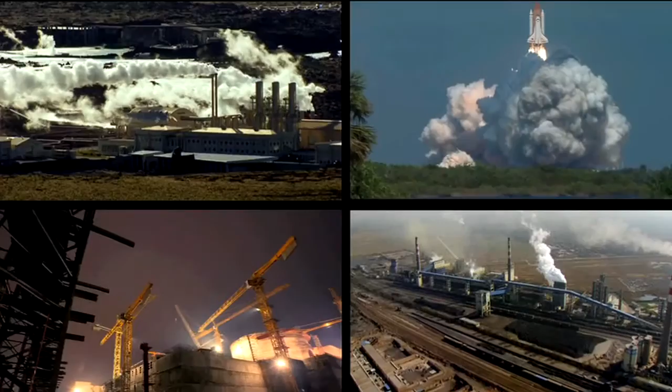We are living in the era of great changes. The power of the human mind has made our life more comfortable, shortened distances, and opened up new horizons. But for the global industry, our era is the time of great challenges.

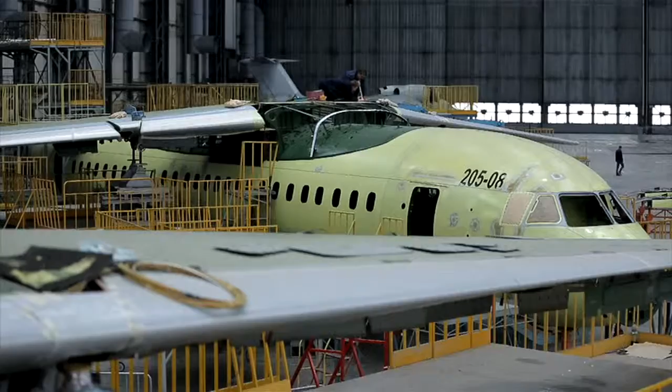The airplane is the fastest and most expensive means of transport. Since the advent of the first aircraft, designers have been working to reduce its weight and make it more reliable, and so reduce the cost of each kilogram carried by air.

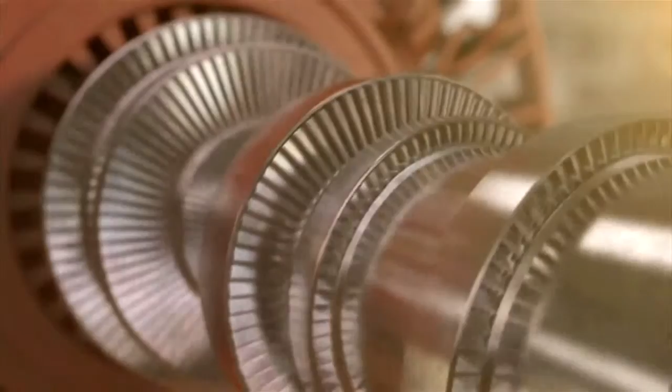Nuclear power is the most promising and cheapest way of generating electric power. However, each structural element of a nuclear reactor operates under conditions of overload and ultra-high temperatures. Extension of their service life and enhancement of their reliability and safety are the main tasks for engineers.

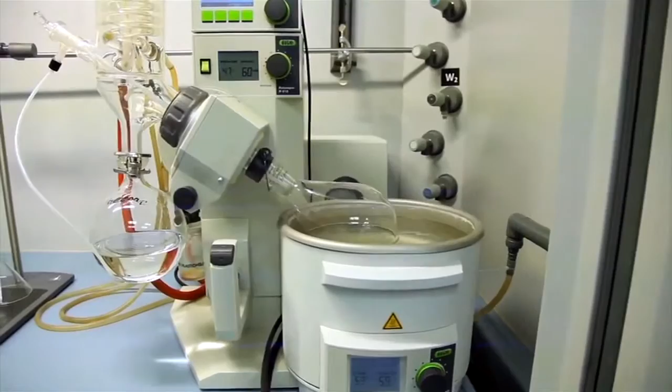Thus, technical progress is impossible without new materials and their new unique properties: ultra-lightness, ultra-strength, and heat resistance. However, the introduction of new materials requires new progressive techniques of their connection.

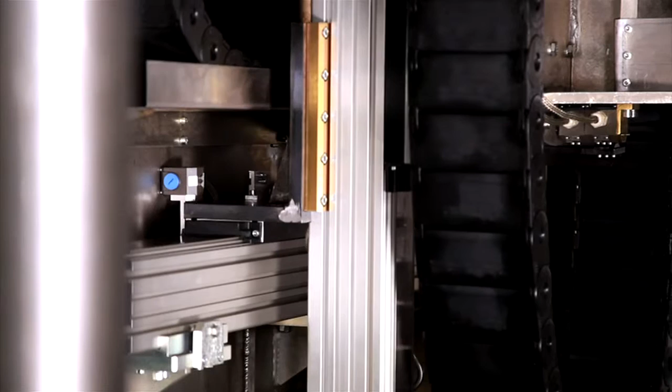For over 70 years, this field of research has been developed here at the Paton Research Institute of Electric Welding. The institute was founded in 1934. It employs 3,500 staff. The Paton Institute has sold more than 150 licenses to the United States, Germany, Japan, Russia,

Sweden, France, China, and other countries worldwide. Structurally, the institute comprises an experimental design and engineering bureau, pilot production facilities, 3 pilot plants, and more than a dozen engineering centers.

The technologies developed by the Paton Institute have served as prerequisites for successful implementation of many audacious global projects, such as forced gasification across the USSR, the world's most powerful weapon, the Satan ballistic missile, continuous welded rail tracks allowing trains to move at 500 km per hour, semi-automatic underwater welding, and welding in outer space.

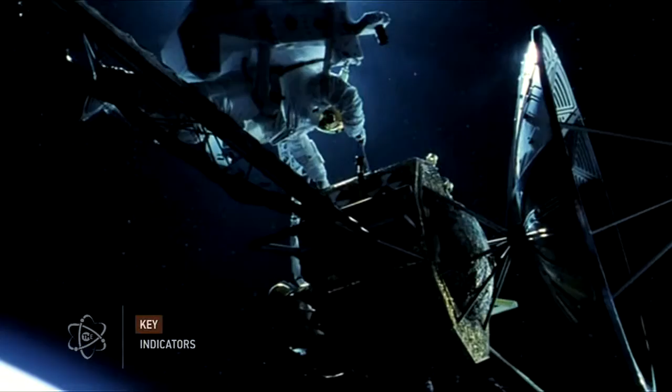Notably, the Paton Institute was one of the originators of electron-beam welding, the technology without which nuclear power engineering and modern aircraft, rocket, and engine building industries would be impossible.

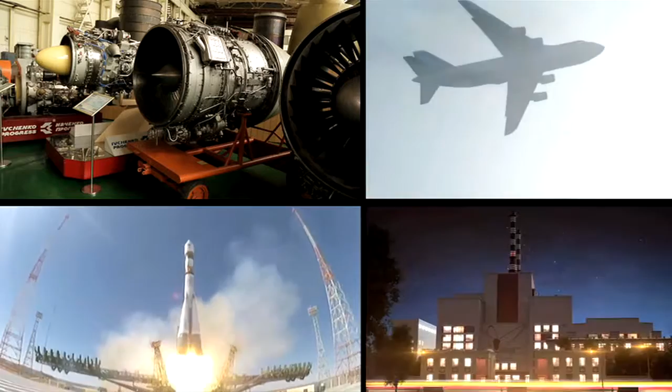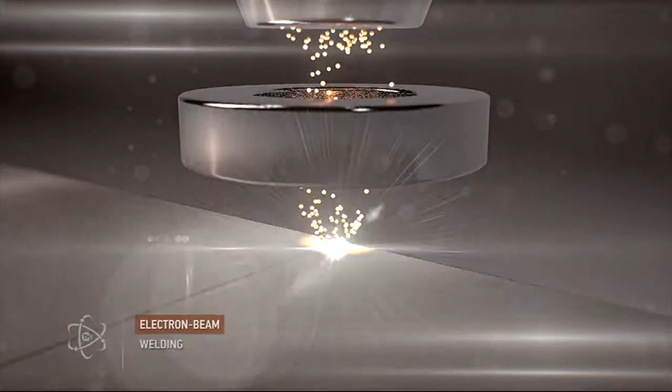How does it work? Electrons are focused into a tight beam and accelerated to ultra-high speeds. When they hit the surface, their kinetic energy is converted into heat, and so metal is heated to high temperatures. As a result, the weld is characterized by large depth and small width.

Electron-beam welding ensures reliable connection of refractory, chemically active, and dissimilar steels, as well as high-strength aluminum and titanium-based alloys. Unlike arc welding, this method reduces energy consumption by 10 to 15 times and the fusion area by 25 times.

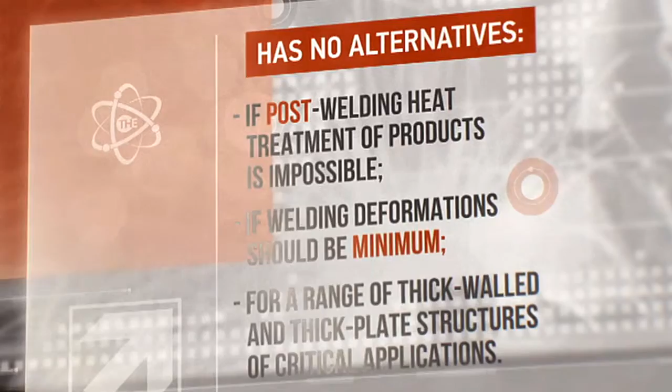Electron-beam welding has no alternative if post-welding heat treatment of products is impossible, if welding deformations should be minimal, and for a range of thick-walled and thick-plate structures of critical applications. Making the most of its powerful scientific potential, the Patton Institute develops unique technologies with due regard for individual customers' requirements. Here are just a few examples.

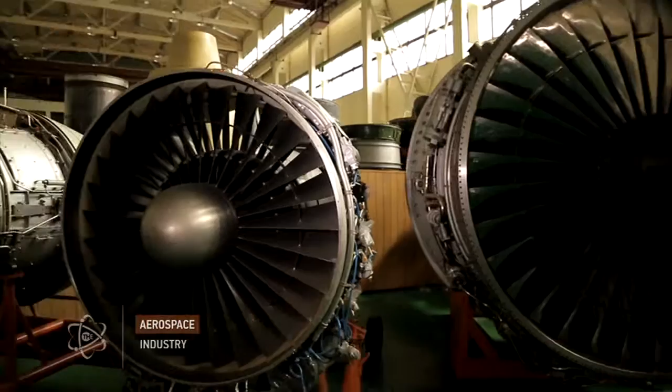The engine is the heart of an aircraft. The manufacturers that offer more economical and more powerful engines win the market. The hotter the gas fed to the turbine, the better these parameters. For this reason, joint connections have to withstand extremely high temperatures.

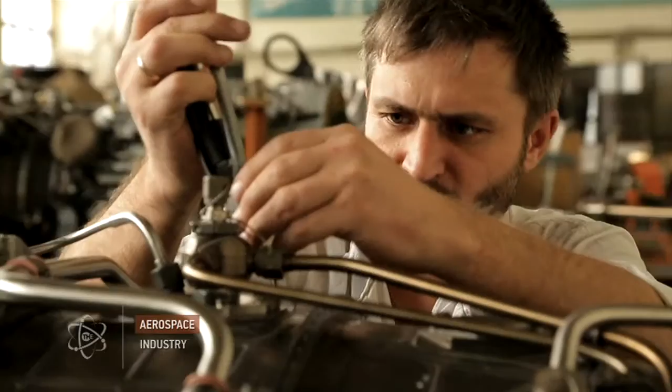In 2014, Patton scientists developed a method to weld the outer part of the casing of the aircraft engine's front intermediate pressure compressor. The customer was Motor Sich, one of the world's leading engine manufacturers. The material was VT5L titanium alloy.

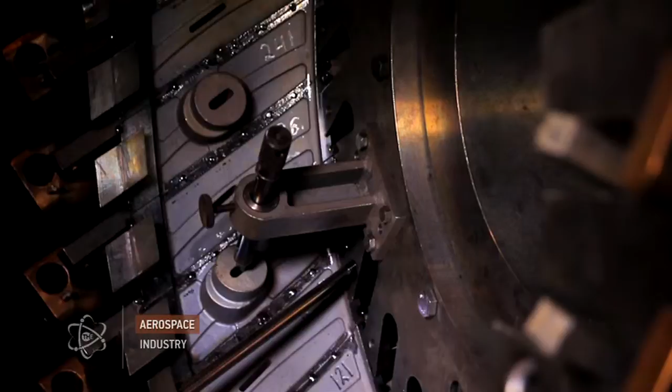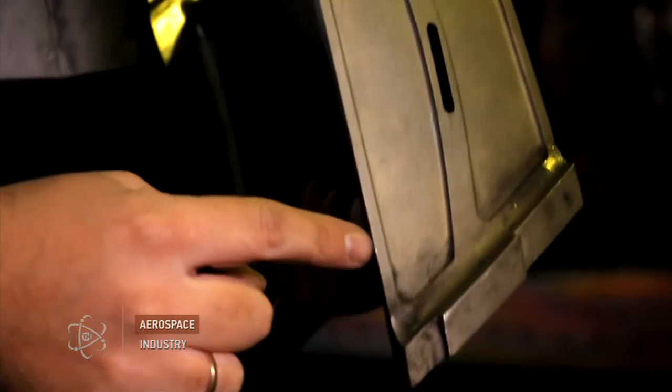Previously, the unit had a cast design, which resulted in high production costs and unstable quality. The developers faced 2 problems while making the welded structure: 1. Geometrically, the joint was a variable cross-section. 2. The through-penetration weld had to be 5 to 25 mm thick and made in one run.

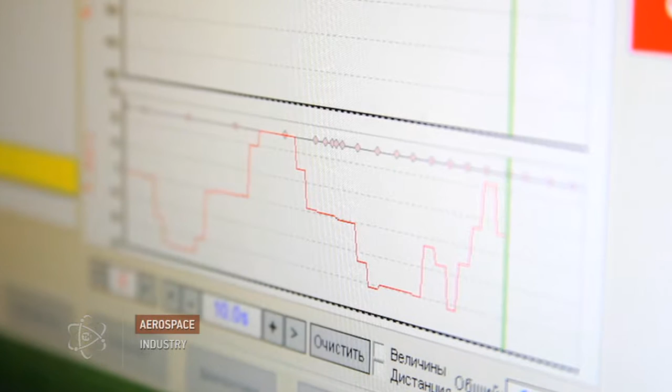Scientists of the Patton Institute found effective solutions to both problems. The process is entirely controlled by special software, and the welding program excludes an operator. The welding factor of joints conforms to the strength factor of the metal body.

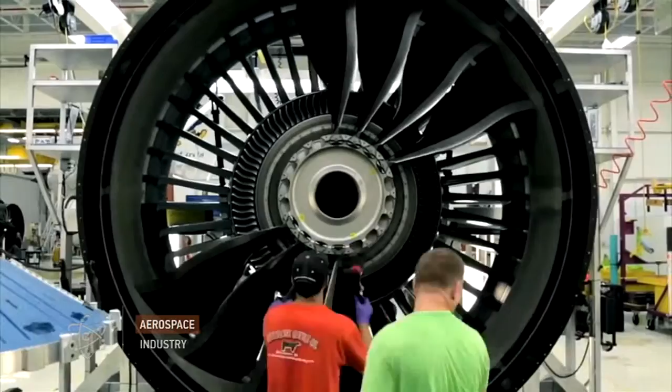The main part of an aircraft engine turbine, the rotating blade, bears the brunt of the heat. The engine's operation fully depends on its strength. And this is about flight safety.

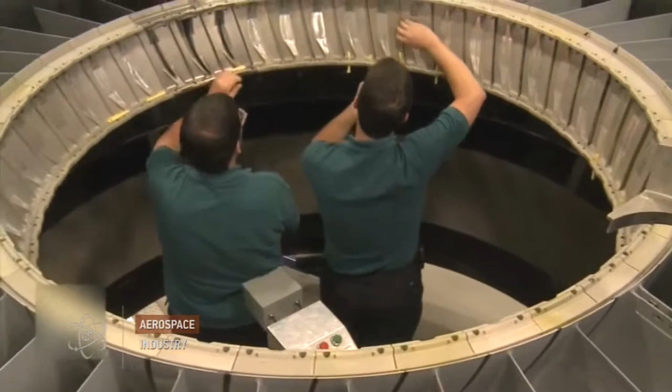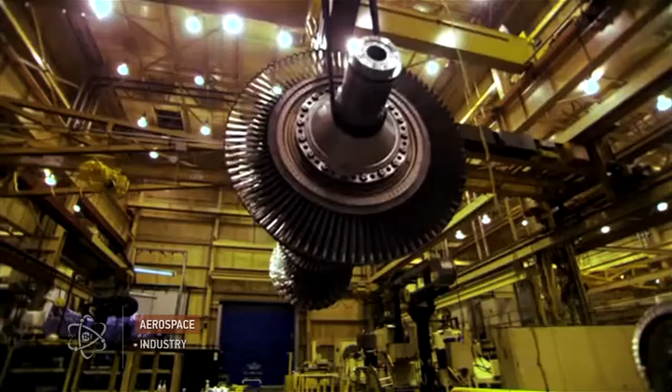Our technology provides for the service life extension of this part by several times. The economic effect is obvious. Currently, a pilot batch of restored blades is undergoing strength tests. After their completion, the method will be applied at the customer's production facilities.

We have developed an electron-beam welding method for high-pressure spherical balloons of spacecraft. The customer is the Space Agency of the Republic of India, and the material is VT6 titanium alloy. As compared with argon arc welding, this method minimizes welding deformations, post-welding mechanical treatment, and weld spatter inside a spherical balloon.

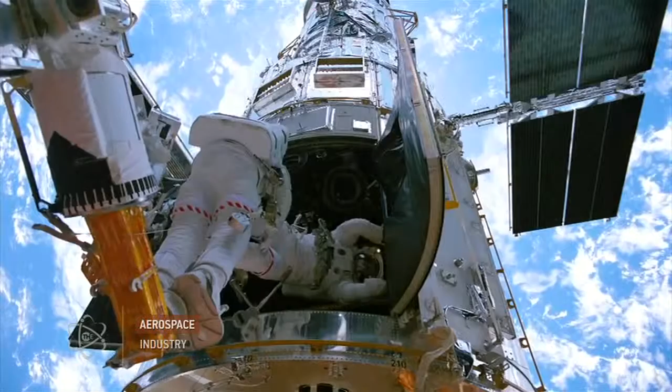Experts believe that the future of the aerospace industry belongs to magnesium alloys, one of the lightest and at the same time one of the most durable types of materials.

However, the introduction of magnesium alloys on a large scale has so far been hindered by imperfect connection techniques. The Paton Institute has developed a hybrid technique for connecting this material. The first stage is friction welding, and the next stage is electron-beam welding.

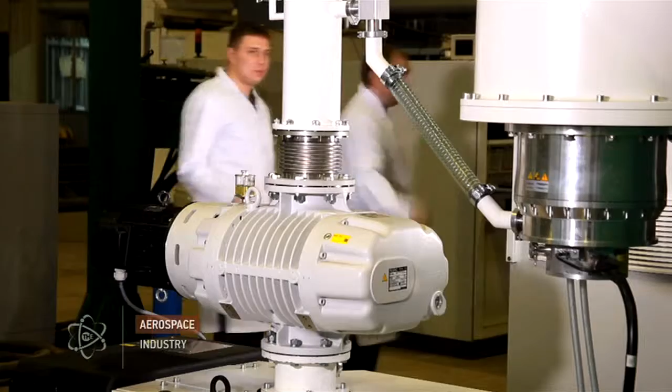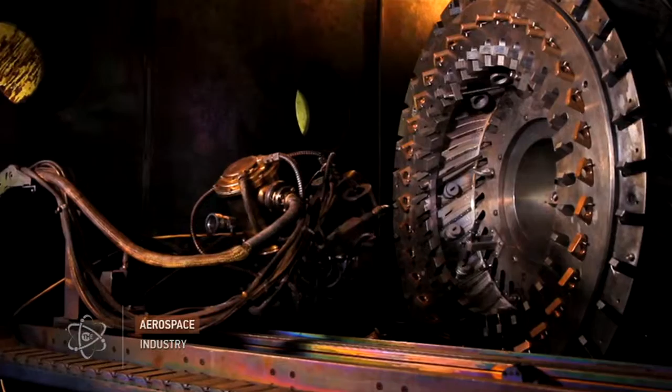Thanks to pretreatment of welded edges by friction stir, cracks and other defects are avoided, and welded joints become almost twice stronger, with their plasticity and impact resistance enhanced as well. This technology has been developed for rehabilitation of intermediate casings of aircraft engines by welding in a 6 mm thick rectangular insert in the damaged area.

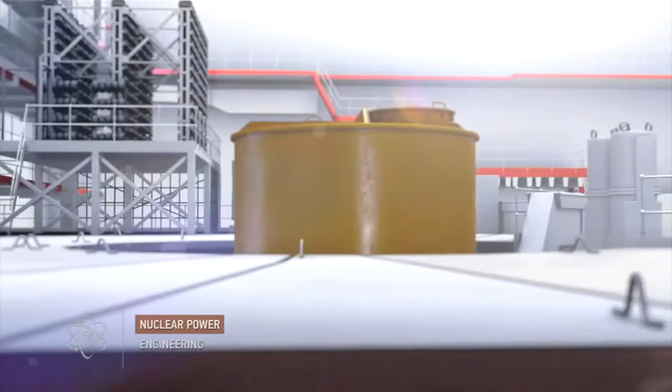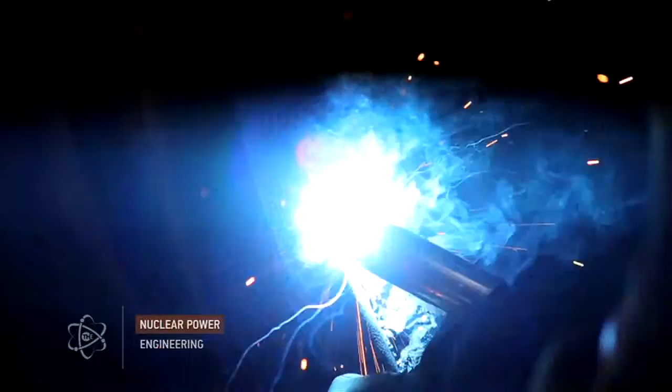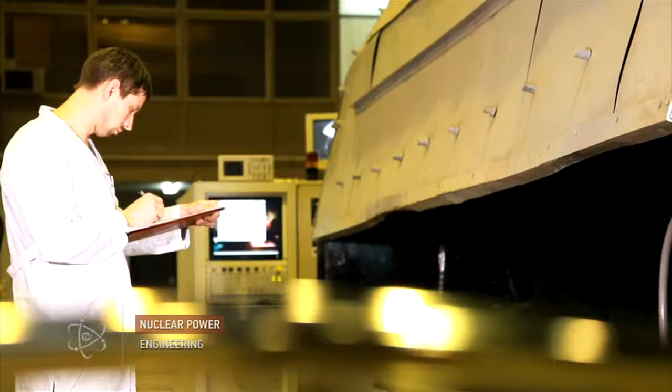One of the most challenging aspects of the global energy industry is reliable connection of thick-walled structures like walls of a nuclear reactor. At present, walls thicker than 40 mm are connected by a multi-layer weld, which sometimes takes up to 100 runs. This technique requires multi-step preparation and significantly increases the likelihood of weld defects, which subsequently affects quality and performance. The Paton Institute has developed a new technique to solve this problem.

The customer is the Russian public holding company Izhorsky Zavody, the only CIS manufacturer of equipment for reactors of the so-termed nuclear island, as well as for reactors of the petrochemical industry. The material is chrome molybdenum steels.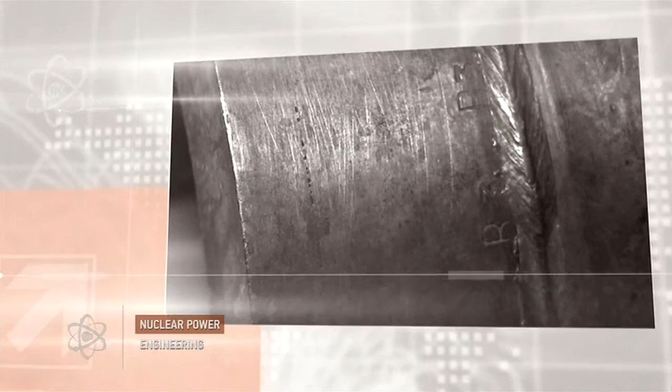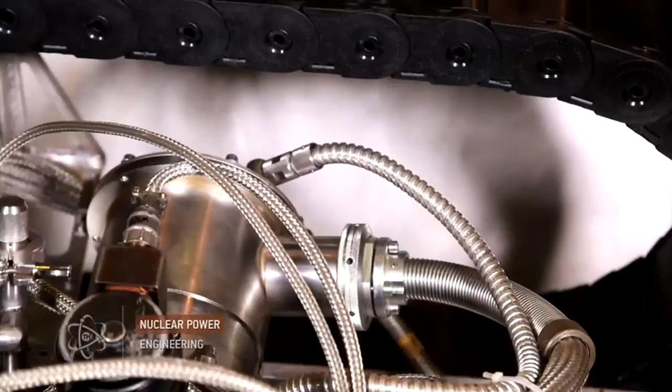Owing to 90 kilowatt beam power, materials up to 200 mm thick can be welded together in one run. This is a unique achievement, yet unsurpassed by any manufacturer of welding equipment. Comprehensive studies have confirmed that the weld is as strong as the metal body. Using this method, the customer is able to skip several preparatory stages and cut the time of welding by several times, thus significantly improving weld joint quality and increasing productivity.

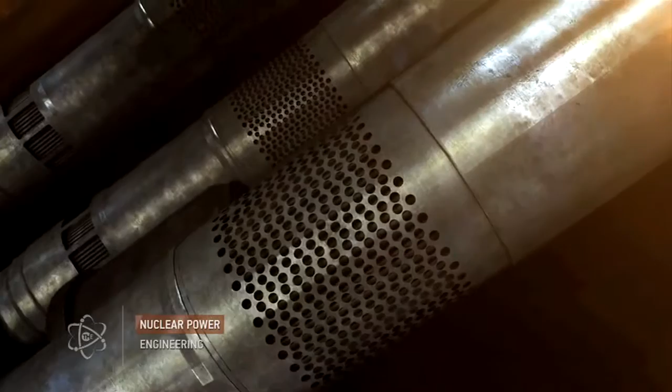A heat exchange unit is the key element of a nuclear reactor. Because of colossal pressure in the tubes reaching 10 megapascals, water does not boil at 270 degrees centigrade. High radiation adds to the most extreme wear conditions.

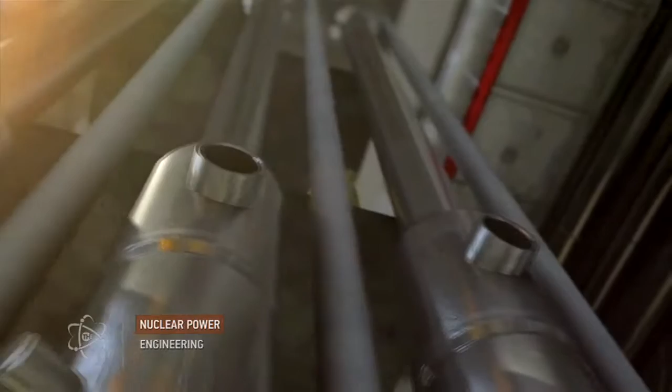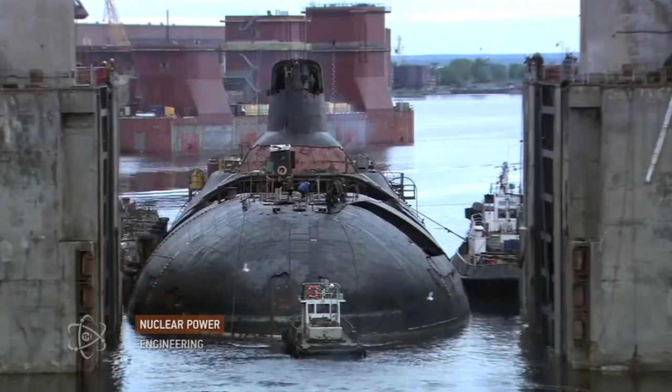The Paton Institute has developed an electron-beam welding method to connect the heat exchanger walls with multiple tubes. Unlike traditional argon arc welding, this method doubles the penetration depth and the unit's service life. The welding proceeds automatically according to a preset program. This method has been successfully applied in the construction of nuclear-powered vessels.

The energy crisis forces humankind to search for and develop new oil and gas fields, and here the main task for engineers is to extend the service life of drill bits. They consist of 3 vertical case segments made from medium alloy high-strength steel. The traditional method of successive welds did not allow for the regular geometric shape of the drilling bit. As a result, its service life and performance characteristics reduced.

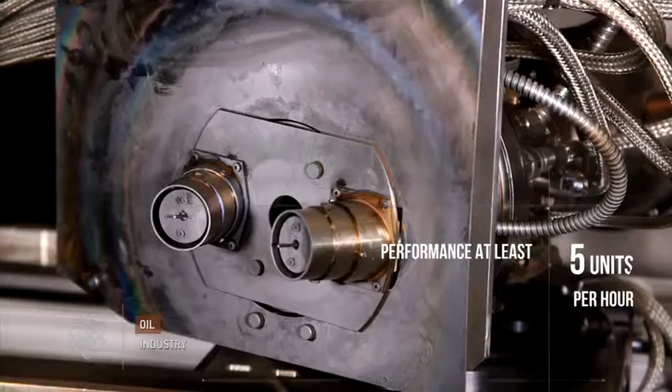The Paton Institute has developed a method of simultaneous 3-joint welding by 3 guns. As a result, output capacity has increased to 5 items per hour. Using this method, the customers have not only increased their outputs by several times, but have also increased considerably the end product's economic efficiency. This technology has been successfully applied at Chinese factories for more than 5 years, allowing them to put out products with higher added value.

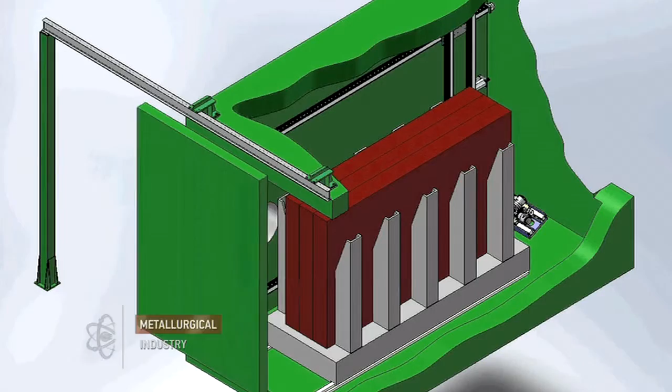Scientists of the Paton Institute have developed a slab connection method for the metallurgical industry. The customers, a pool of integrated iron and steel works in China, needed to increase the thickness of their slabs from 20 to 40 millimeters. However, they were limited by the rolling mill's capacity.

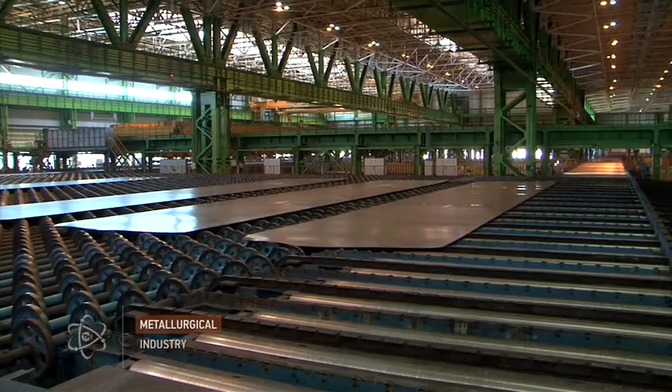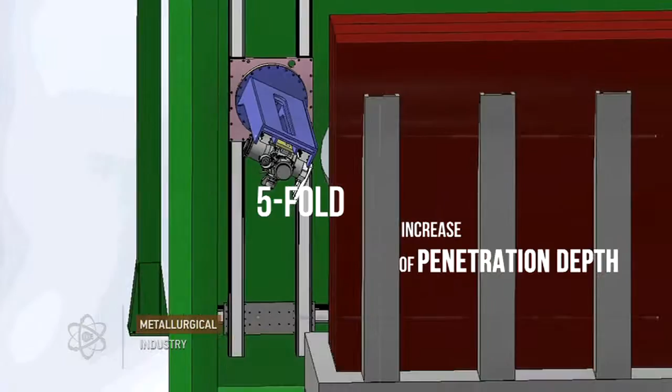Traditional welding methods did not allow them to obtain homogeneous material because of cavities with air forming inside. Electron beam welding takes place in vacuum. At the same time, penetration is 5 times deeper than in arc welding. This ensures homogeneity of metal during subsequent rolling and the output capacity of 1 item per hour.

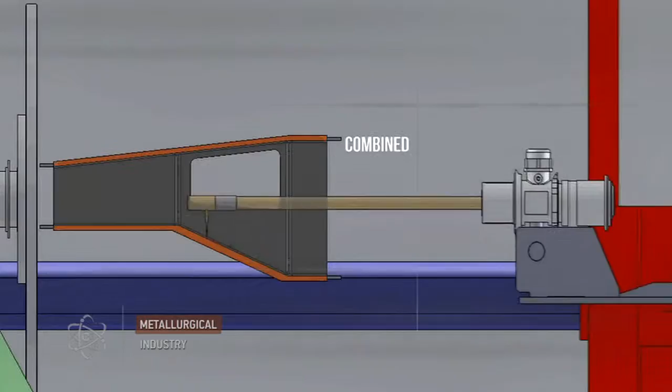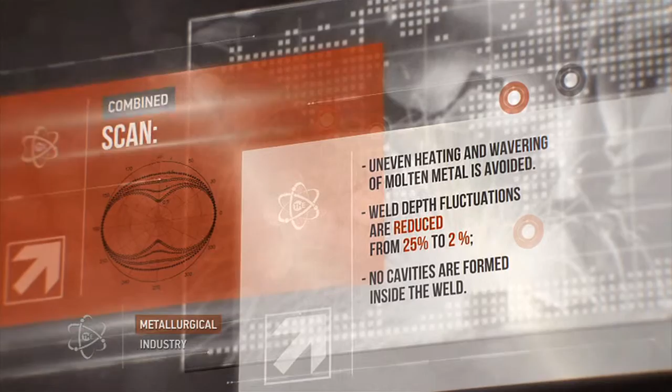The Patton Institute successfully applies combined electron beam scanning, wave, circular, etc. This helps to avoid uneven heating and ripple of molten metal. As a result, weld depth fluctuations are reduced from 25% to 2%, and welds have no cavities.

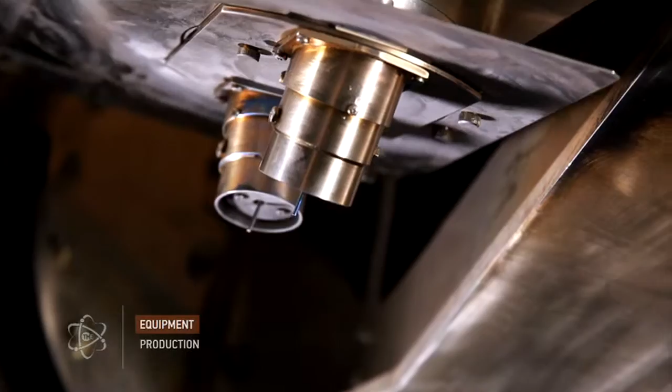The Patton Institute has been developing and manufacturing electron beam welding equipment since the 1960s. What are the unique advantages of our equipment? Our welding units have the smallest guns in the world, so firstly they weigh less, and secondly the gun moves faster, increasing the unit's efficiency.

The welding electron beam is monitored and controlled by the raster joint tracking system. The gun reads the weld geometry, even the most complex one, like an electronic microscope, and converts the obtained data into a mathematical model. The human factor is excluded completely.

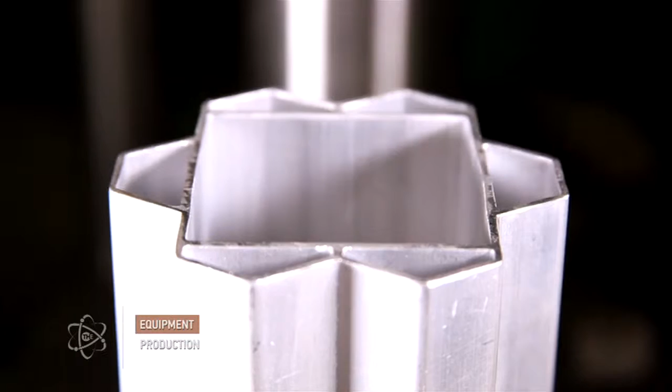At the second stage, raster analyzes how the material behaves during welding. The system scans the weld additionally and adjusts the beam trajectory. Over the last 10 years alone, 57 electron beam welding units with chamber volume from 0.5 to 100 cubic meters have been put into operation. The Institute's customers are such leading machine builders as Boeing, Hitachi, Mitsubishi, Airbus, Turboatom, Motor Sich, Zoria-Mashproekt, and others.

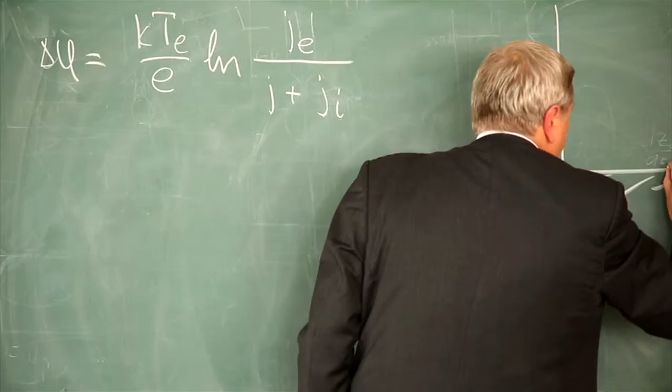So what's the secret of the Paton team? It is a unique scientific school, high-tech production facilities, focus on global projects, persistence, and unprecedented revolutionism.